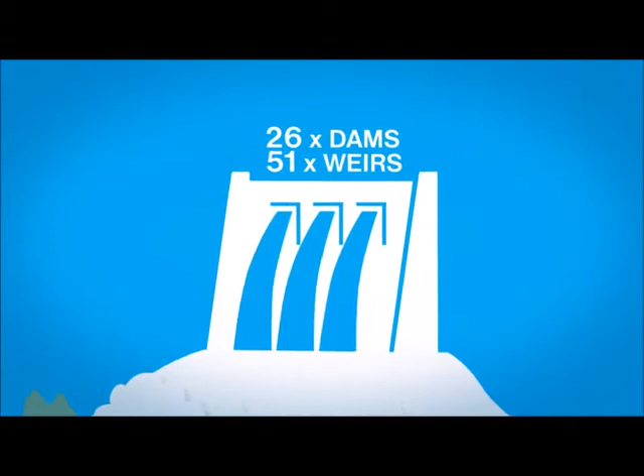Southeast Queensland uses about 300,000 megalitres of water a year, which is about 120,000 Olympic swimming pools. Roughly 70% of that water is used for residential purposes. That's about 165 litres of water per person per day and more in summer. The water we use starts its journey as rain. Water flows into a dam from rain falling in the area around it called a catchment. SEQ Water has 26 dams and 51 weirs to store the water we need to use when we need it. Dams and weirs also help mitigate floods and also provide the community with popular recreation facilities.

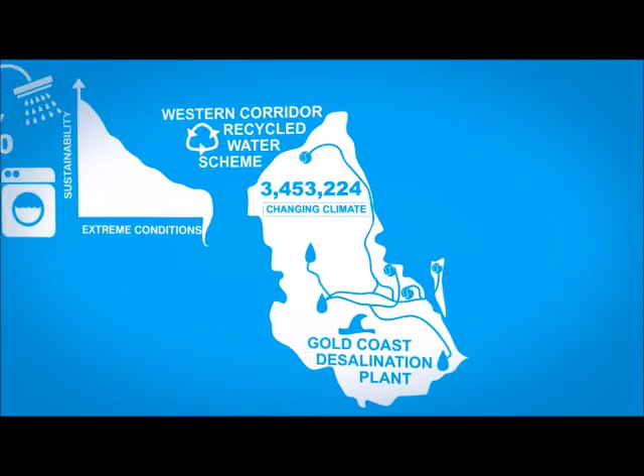We live in a climate of extremes. The volume of rain and where it falls can be unpredictable. We have long droughts punctuated by extreme floods. With our increasing population and changing climate, there is more pressure on our water supplies than ever before. The SEQ Water Grid is our connected network of water catchments, storage dams, treatment plants, reservoirs and pipelines. SEQ Water also have two climate-resilient sources of water, the Gold Coast Desalination Plant and the Western Corridor Recycled Water Scheme. No matter where you are in the region, it's important we develop good water habits so we have enough to meet future demand. Everyone has a role to play in using water wisely, so there's enough for everyone.

Well, that last little video just gives you a little bit of an indication and backs up what I said, just how the operation of the organisation goes. So it gives you an overview of how things operate. Let's move now to Wivenhoe. Wivenhoe is the largest dam that we operate of our 26 dams. It was built in the 1980s to offer two particular things to us. Obviously supply water, but also as a flood mitigation dam. There was some great flooding in the 1974 floods in Brisbane, as we know. And after that time, Wivenhoe Dam was built.

About 1.3 million megalitres of water of storage can be held for drinking, and a further 2 million or thereabouts can be held for flood mitigation if required. And obviously in 2011 and since that time, during Cyclone Oswald and other times, the dam has been used to store water as such. The 2011 floods were quite significant in that they were two single rain events greater than the 1974 floods, and the amount of water certainly provided for interesting times in terms of how we operate those facilities.

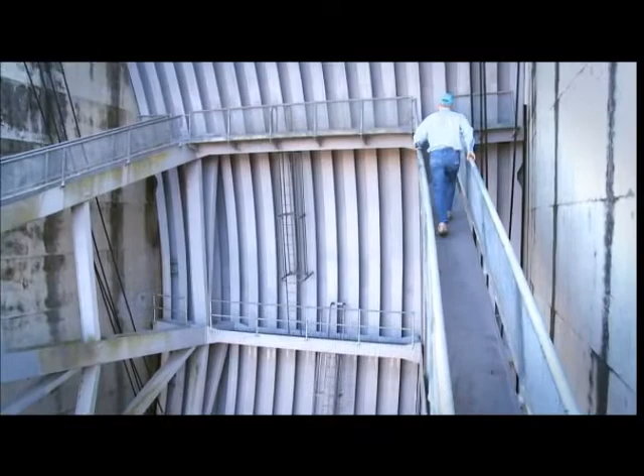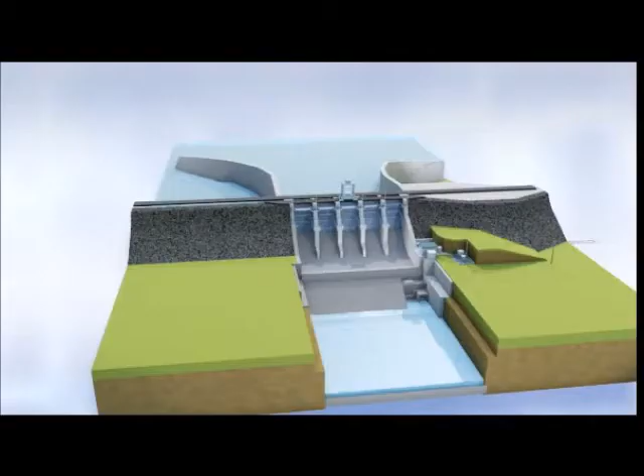Wivenhoe Dam. Wivenhoe Dam was designed and built as a multifunctional facility. As part of the Seqwater grid, Wivenhoe Dam's main function is to provide safe drinking water to Brisbane and the surrounding areas. It is also used to generate hydroelectricity and for flood mitigation. The dam has a storage capacity of 1.16 million megalitres for urban water storage. During a flood, however, the dam is designed to hold up to a further 2 million megalitres for a limited amount of time. This helps to prevent small floods and reduces the impact of a large flood.

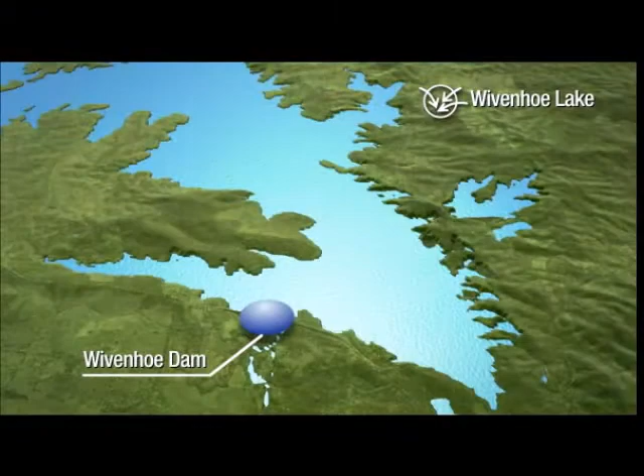Lake Wivenhoe, which is the body of water formed by the dam, is also the lower storage for a hydroelectric power station situated on the shore of the lake opposite Wivenhoe Dam wall. Enjoy the tour.

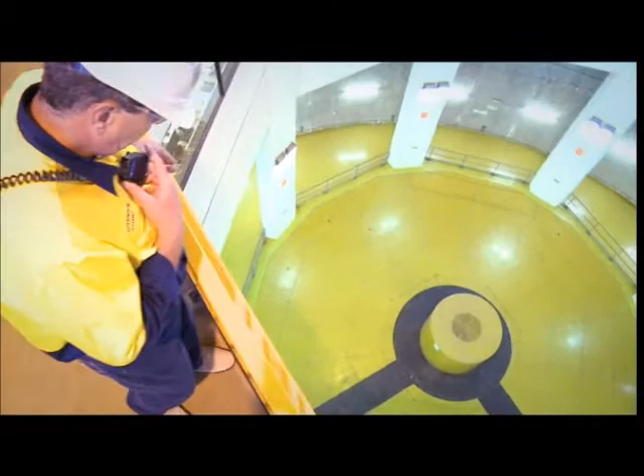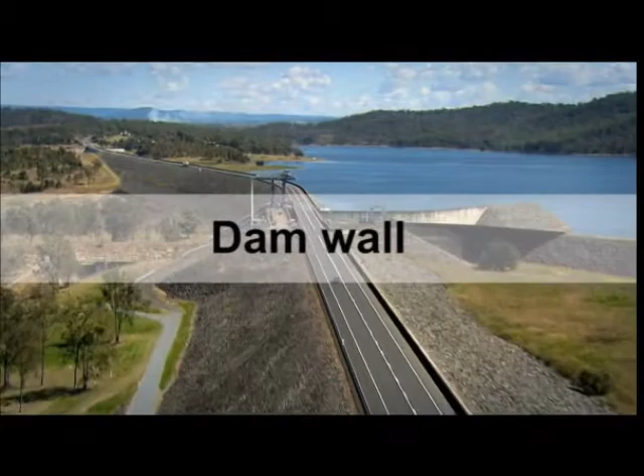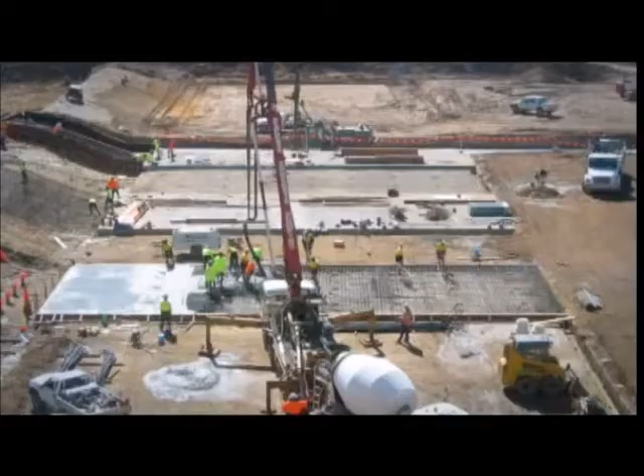Dam wall. Lake Wivenhoe was formed by building a solid dam wall across the river valley, stopping the river flow. This created a water storage for the community to use. Opened in 1985, the dam wall at Wivenhoe is 2.3 kilometres long and 50 metres high.

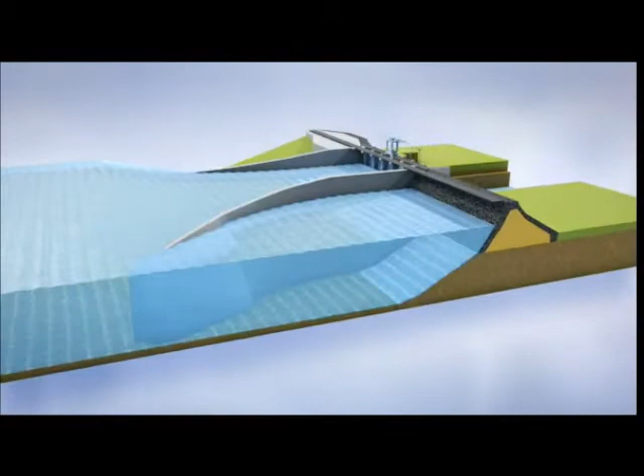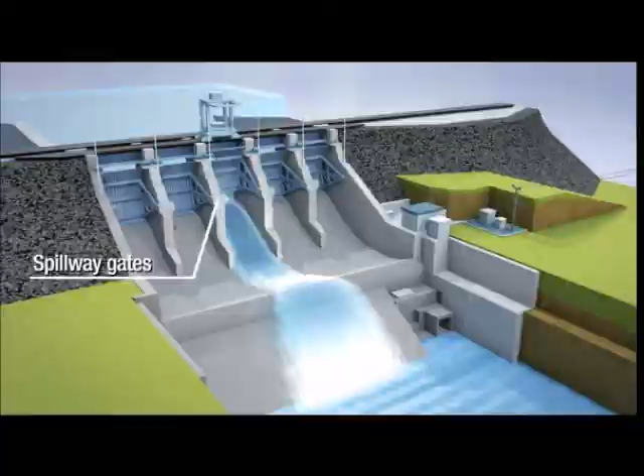It is built with a solid core of clay in the middle to prevent water leakage and an outer layer of rock for strength. It has a built-in spillway, which is a section of a dam designed to let a controlled amount of water out into the Brisbane River. Normally, this release is to maintain the river system and to provide water for treatment plants. However, in a flood, spillways also stop a dam from overflowing, something that could damage or destroy it.

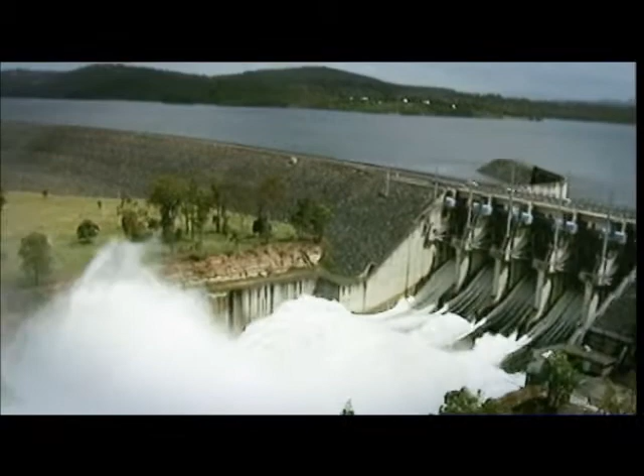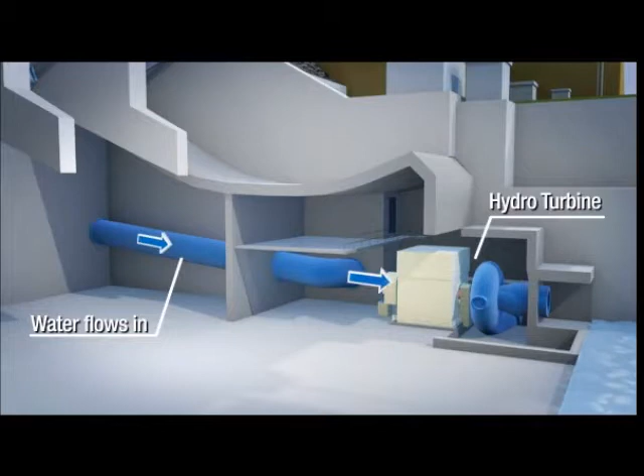Within the dam wall, there is also a small turbine used to generate hydroelectricity, which is one of the cleanest and most efficient forms of energy generation.

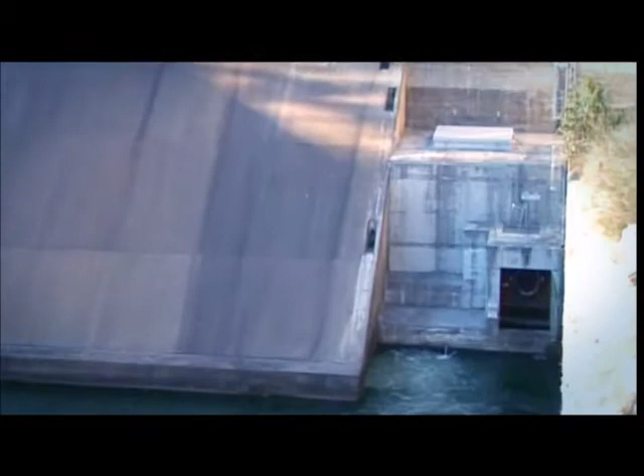Rainfall and storage. Australian weather has always been about extremes. Frequent periods of severe drought and major flooding are well documented throughout the continent. Experts predict that climate change will have an increasing impact on natural ecosystems through increased temperatures, extreme weather events, and less rainfall in many regions of Australia.

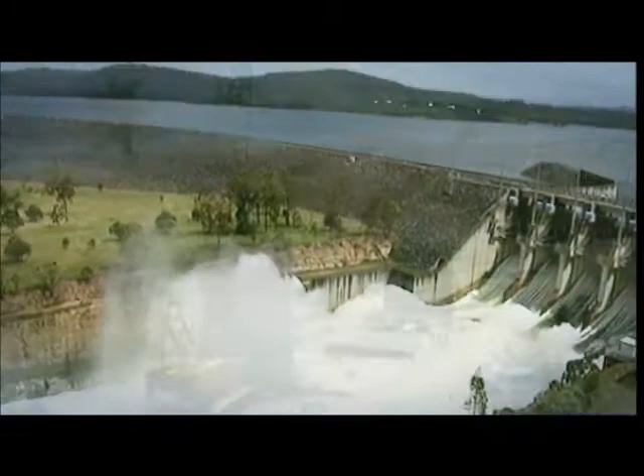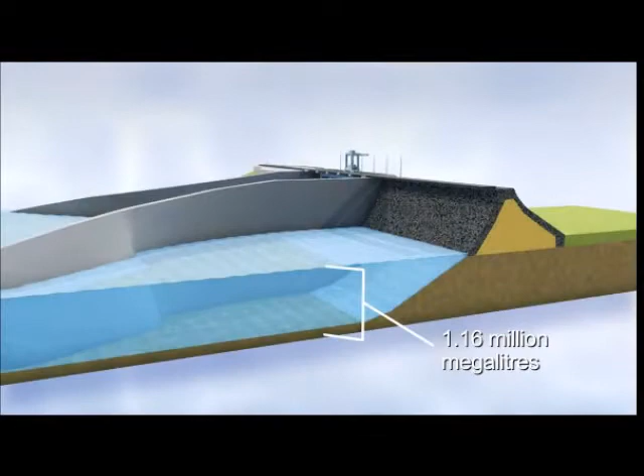Wivenhoe Dam was originally designed as a flood mitigation and water storage dam following the 1974 flood. At full capacity, Wivenhoe Dam contains 1.16 million megalitres of drinking supply and more than double that of temporary floodwater storage. After 7 days of storage at full capacity, the floodwater held in the dam has to be released. In an extreme flood, an auxiliary spillway wall will erode away to allow further floodwaters to be released and to ensure the safety of the dam wall.

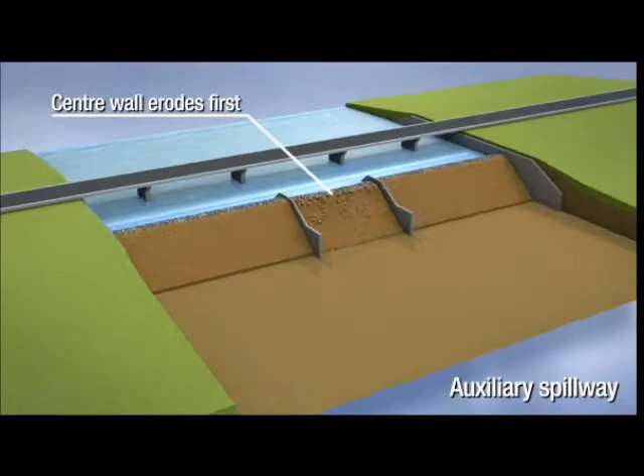Well, I hope Wivenhoe is very clear in your minds now and you have a good understanding of it. But again, when this whole crazy business is over, we'd be very keen to take you out and have a look, because there's nothing like standing within the wall, having a look at the facilities around there and just seeing how much of a massive beast it really is. A lot of people take it for granted, but it's an incredible facility, and it's really worthwhile getting a look at firsthand. So hopefully you'll get a chance of looking at that at a later stage.

We're now going to travel down the river, 60 kilometres or thereabouts, and we're going to end up at Mount Crosby water treatment plant. The original Mount Crosby water treatment plant, the pumping station, was built in the 1890s to supply water from the Brisbane River in the early days via a number of our early dams, Lake Manchester and Gold Creek Dam and those. Today the water goes to the Mount Crosby weir, where it is pumped out to two stations.

East Bank takes the water, and it can produce at its maximum around 700 odd megalitres of water. There's also a newer plant that was built later called West Bank, and we can produce at full capacity there about 250 megalitres of water. So working full capacity, East Bank and West Bank could probably supply our southeast region, but the reality is we've still got to pump it over very long distances. So we're going to have a look at West Bank. As I said, we take the water through a number of facilities from the river into the treatment plant where it's treated. And the water treatment process is very simple.

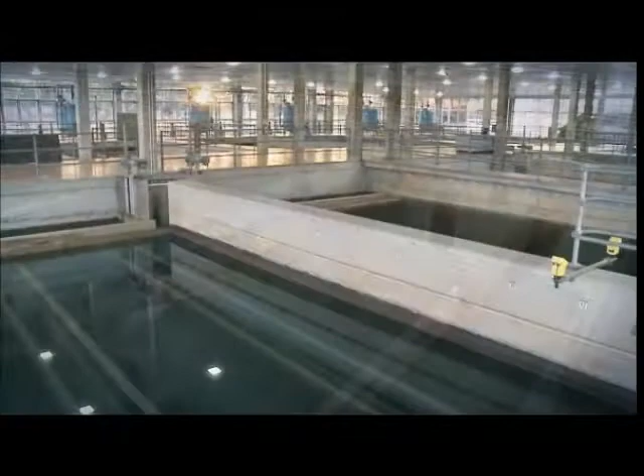Treating water. The West Bank water treatment plant at Mount Crosby takes water from the Brisbane River and treats it to drinking quality before it is sent to customers' taps. During the treatment process, organic matter, sediment, and minerals such as manganese and iron are removed. Finally, the water is dosed with chlorine. Fluoride is added to reduce tooth decay.

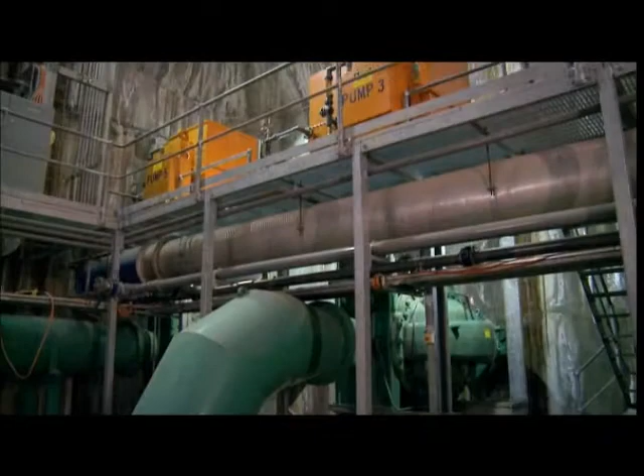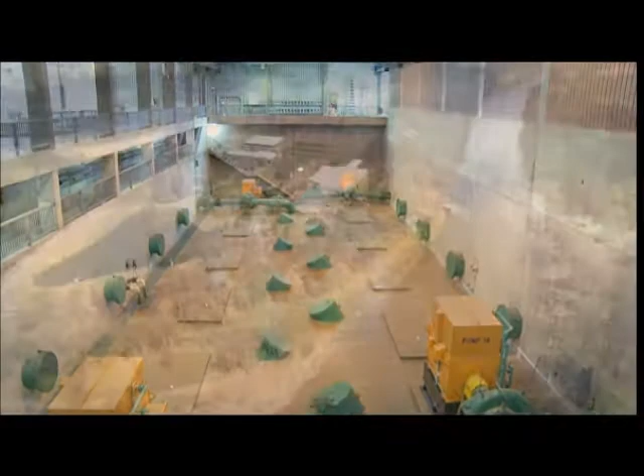The water is monitored and tested at all stages of its journey through the treatment process to ensure that by the time it leaves the plant, it meets Australian drinking water guidelines, which are amongst the strictest in the world. The plant has a capacity to produce 250 million litres of drinking water a day. It can be expanded if required to be 4 times larger in size. Enjoy the tour.

Drinking water supply. Drinking water is pumped to reservoirs at Cameron's Hill. Fluoride is also added prior to Cameron's Hill reservoirs as a protective dental health measure. As the water leaves Cameron's Hill Reservoir, chlorine and ammonia are added to produce chloramine, a long-lasting disinfectant that prevents the formation of microorganisms. East Bank and West Bank water treatment plants produce enough water to supply Brisbane and surrounding areas that are connected to the South East Queensland water grid.

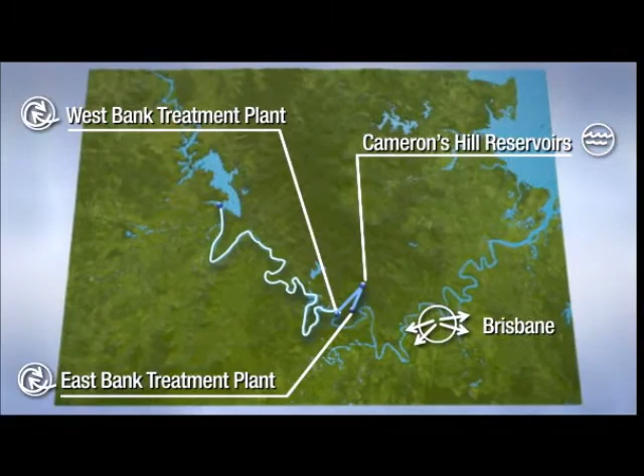The water from the East Bank and West Bank treatment plants supplies the Brisbane region and connects to the South East Queensland water grid. The water grid is a network of treatment facilities, pipelines, dams and reservoirs that moves treated water across the region to where it is needed.

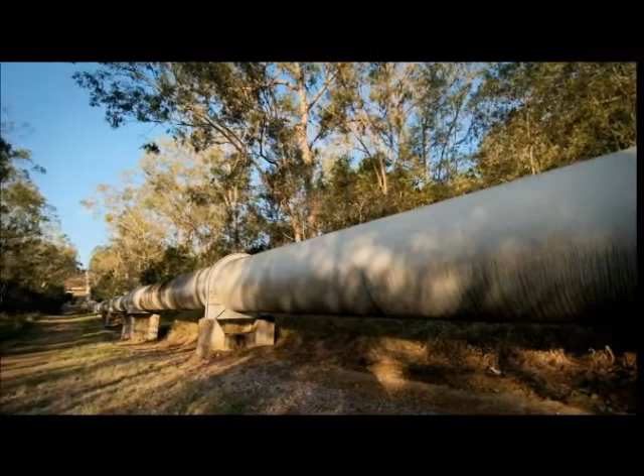Okay, so far we've got the water in the storages at Wivenhoe. You've seen that. We're moving down the river now. We've gone to Mount Crosby. You've seen how we've cleaned the water up there. And as I said, the most important thing we've got to really worry about is the silt and the material that's in the Brisbane River. Remember, after the water comes out of Wivenhoe, it travels down the Brisbane River, and there are a lot of farms, there's fertiliser and things that end up in the water supply, and there's also sewage plants that release their effluent into the Brisbane River as well. So Mount Crosby's a significant facility and quite important to the people of Brisbane.

But as I said to you, all of that's fine and good as long as we have rain. If our dams are full, that's great. But even in flood time, if the water is too dirty, too turbid, we can't treat it, as we did in 2011. So we need to have alternative water supplies. In the 2011 floods, we were able to bring water from the desalination plant up into Brisbane to supply water there for quite a while when many of our treatment plants were inoperable.

But now we're going to travel to Bundamba, not far from Mount Crosby, and here is our advanced water treatment plant. One of them that takes water from the river and takes water from Goodna, Bundamba, and a couple of other sewage treatment plants that are owned and operated by Queensland Urban Utilities. The water is already treated to an environmentally friendly standard that's dropped back into the river, but it still has elements in it, nitrates and phosphates, that are not good for the environment. But it also has organic matter in it and other biological matter which we can remove through the processes at this advanced water treatment plant. And Bundamba operates to be able to provide that water for the future.

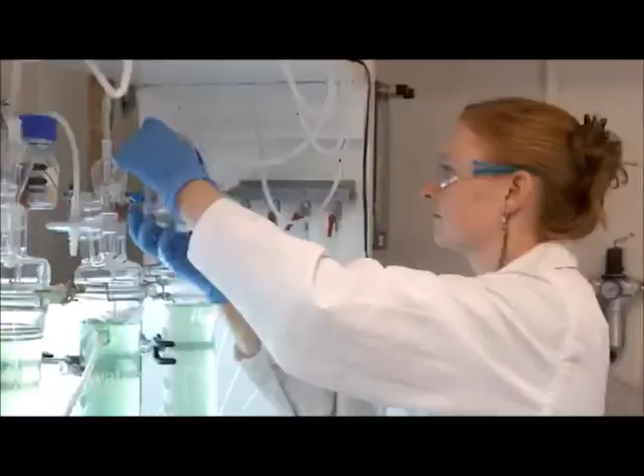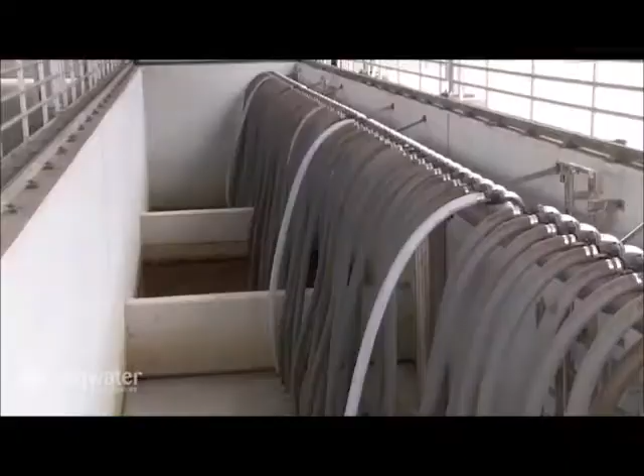Water we've already used, called wastewater, is generally treated before being released into our rivers or oceans. Recycling this water for drinking means taking this pre-treated wastewater and purifying it to exceed drinking water standards so that we can use it again rather than waste it. How is this done? The wastewater undergoes multiple processes to purify it. The key ones to be aware of are microfiltration, reverse osmosis, and advanced oxidation.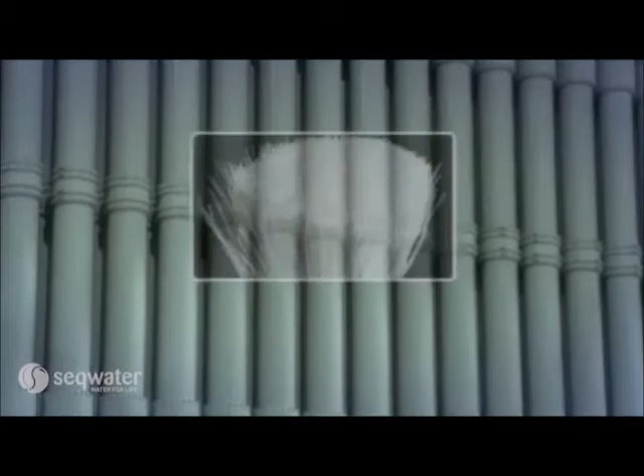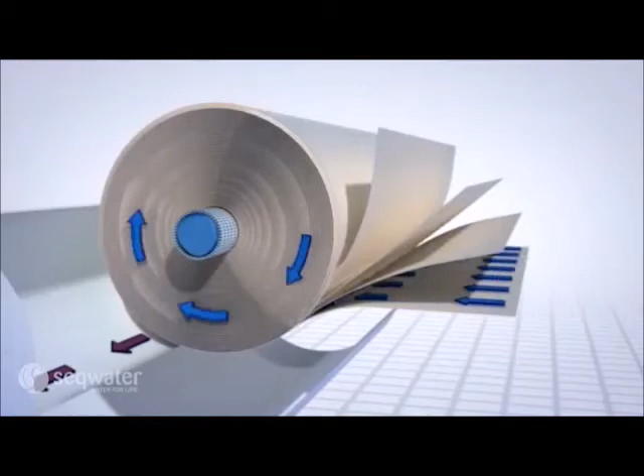To explain, microfiltration involves passing the pre-treated wastewater through fine membrane filters that remove particles and microorganisms, including bacteria and some viruses. In the reverse osmosis stage, this filtered water is forced through a special membrane at high pressure to further remove other impurities, such as pesticides and viruses.

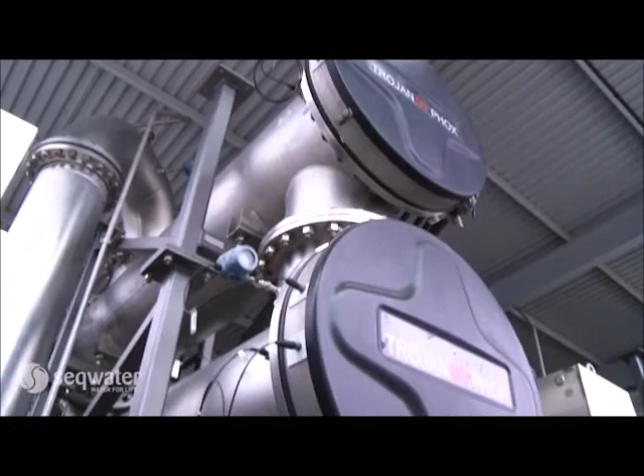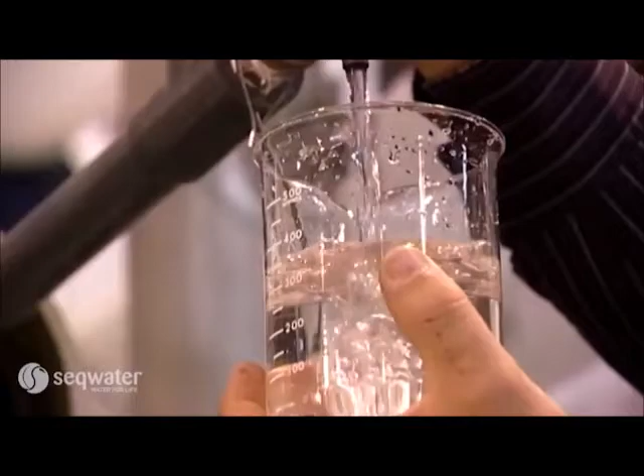Finally, during advanced oxidation, the water is exposed to ultraviolet light and hydrogen peroxide. This process removes remaining traces of organic compounds and organisms. The result is purified water of a very high quality. In fact, the water exceeds Australian drinking water standards.

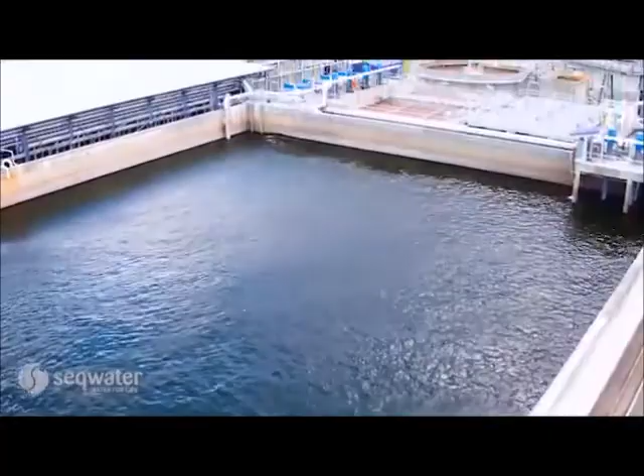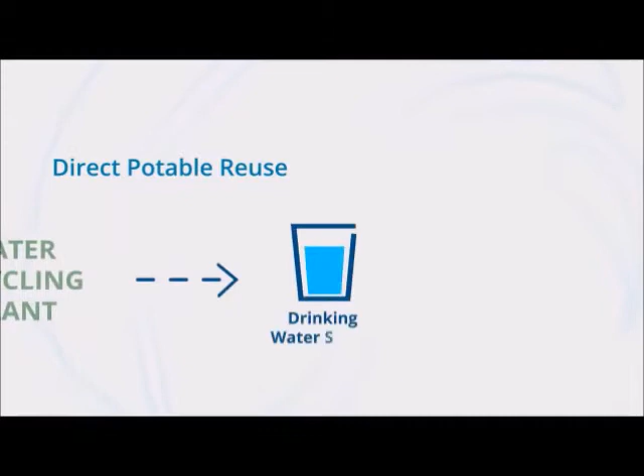There are two ways purified recycled water can then be introduced to our drinking water supply: direct potable reuse and indirect potable reuse. Direct potable reuse means putting the now purified recycled water directly into the drinking water supply. This is an energy and cost-efficient method of recycling water, as it eliminates the need to pump the water to a storage facility, then retreat it.

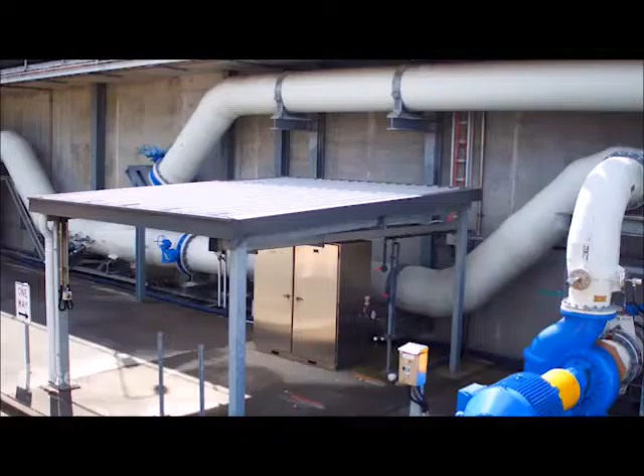Direct potable reuse schemes are growing internationally, with countries such as the United States and South Africa increasingly using it as a vital water source. Current state regulations don't allow for direct potable reuse schemes in Queensland. This may change in the future as acceptance and understanding of these schemes increases.

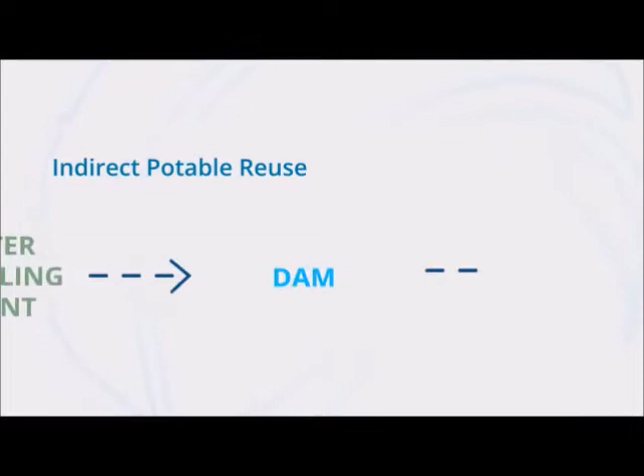Indirect potable reuse means adding the recycled water to other untreated water, generally in a dam or groundwater basin. The purified water mixes with the untreated water and is treated again in a conventional water treatment plant before entering the water supply. This water supply is currently being used in over 20 sites across the world, including California, London, Singapore and Perth.

Sometimes indirect potable reuse is unplanned. This happens when communities along a river or waterway discharge their treated wastewater into the river, which then flows on to communities downstream, where it's extracted and treated for drinking water. This is common in Australia and around the world.

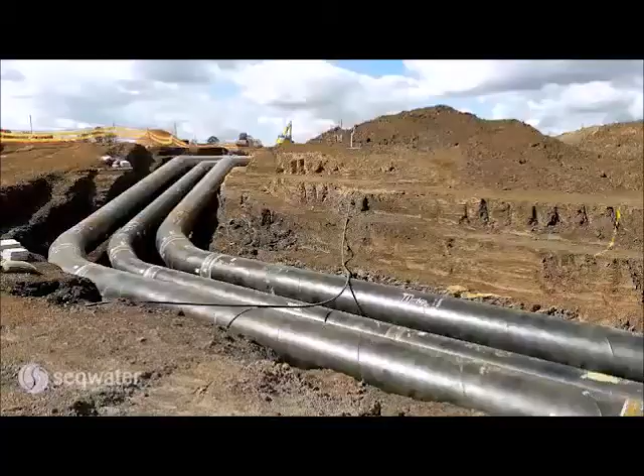In southeast Queensland, we have the ability to produce purified, recycled water through the Western Corridor Recycled Water Scheme. This scheme was built during the Millennium Drought, but is not currently in use. When operating, it can produce up to 180 megalitres of water per day. This water can be used to replenish Wivenhoe Dam before being treated again at the Mount Crosby water treatment plants.

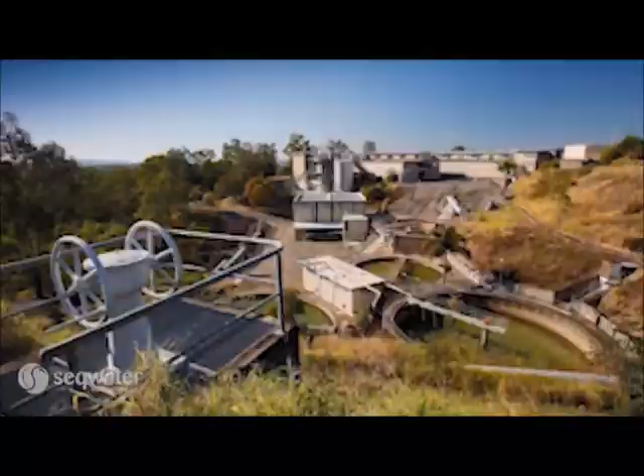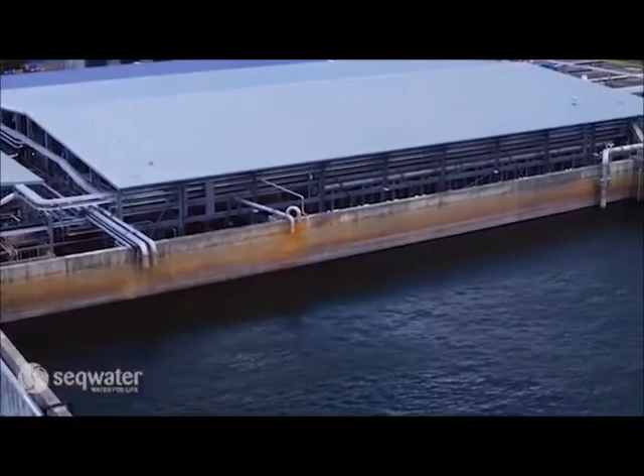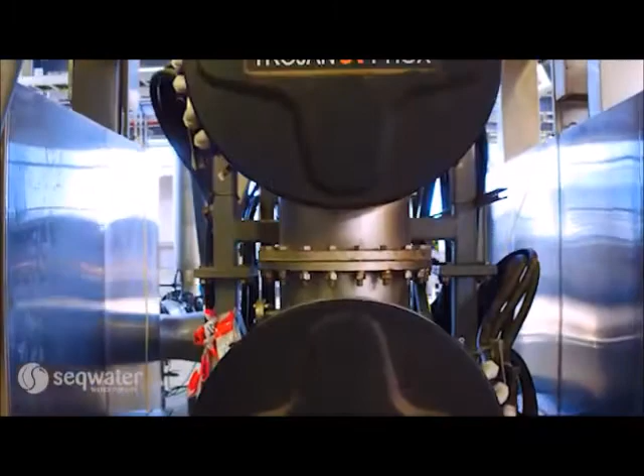Recycling water for drinking is a climate-resilient option. It is marginally impacted by drought, as we generally use less water during dry times, meaning there's less wastewater available for purification. In comparison to other water supply options, recycled water is less energy intensive and less costly than desalination, but it does require more energy to produce than surface water and is therefore currently more expensive.

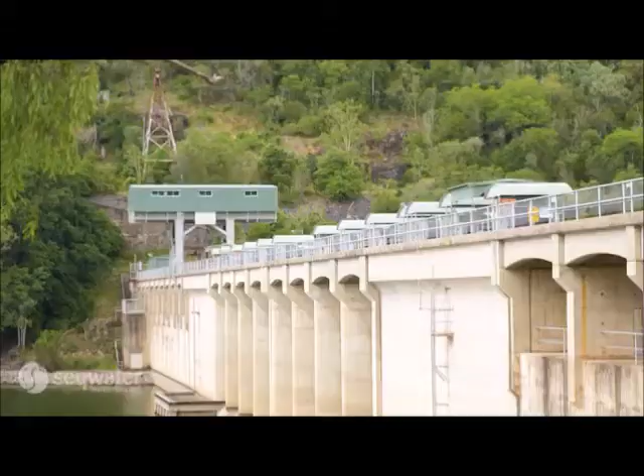The regulators of water recycling schemes here in Australia and worldwide currently ensure the monitoring of water quality standards are higher than those applied to most other water supply options. Regardless of whether recycled water is introduced to the water supply directly or indirectly, it is a resilient water source, often resulting in reduced nutrient discharge into our waterways.

Well, that's about it, folks. I hope you've enjoyed the journey of water from the clouds to the tap, basically.

As I said, Wivenhoe Dam is a tremendous facility, and our other dams within our network operate exactly the same way in many respects. As I said, there's only a number of gated ones, but a lot of them are passive spillways. But the reality is that they all combine to give us a capacity to supply water, whether it's a dam, a weir, an aquifer, or something else within our network.

It provides that. And the people that work within our region as Seqwater team members are certainly playing a very important role in supplying water and water security within Southeast Queensland.

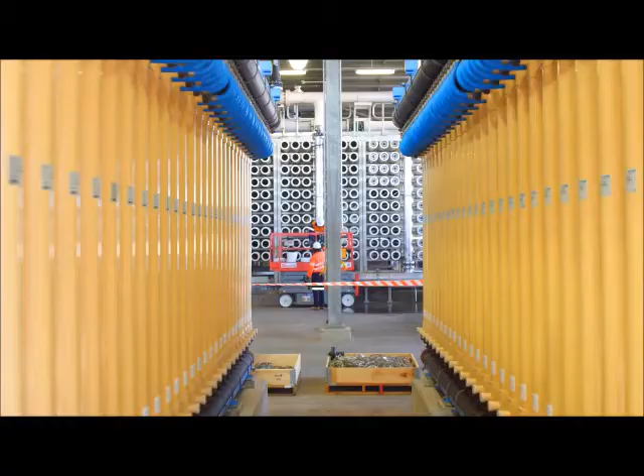Whether you drink it, work with it, or play in it, water is an essential part of every Southeast Queenslander's life, every day. Delivering that water to more than 3 million people in a safe, clean and reliable way is what Seqwater does. That means much more than managing our 26 dams and catchments, because dams hold water, they don't make it. The lessons we've learned from the Millennium Drought and from subsequent floods is that you can't always count on the rain when we need it, where we need it.

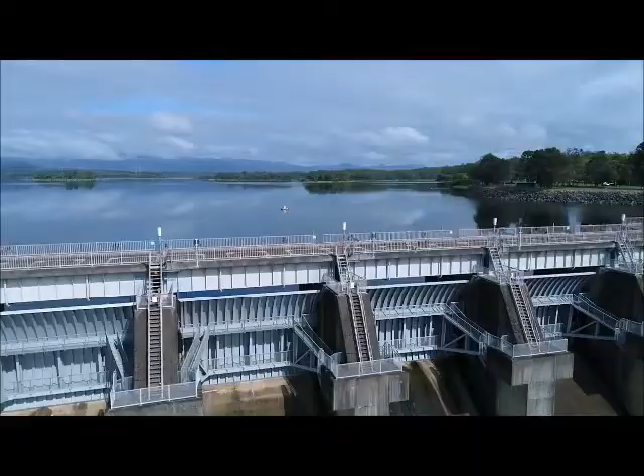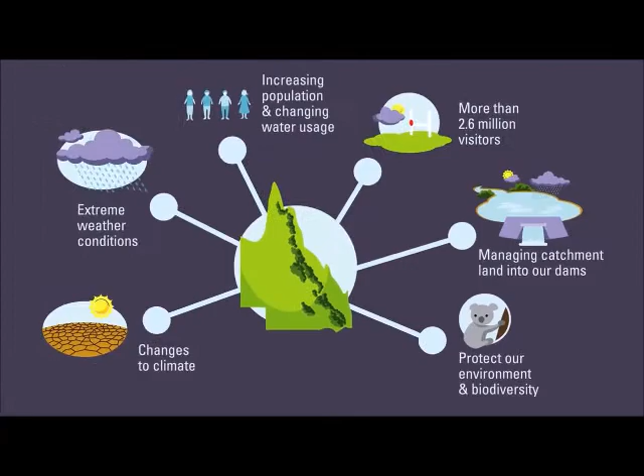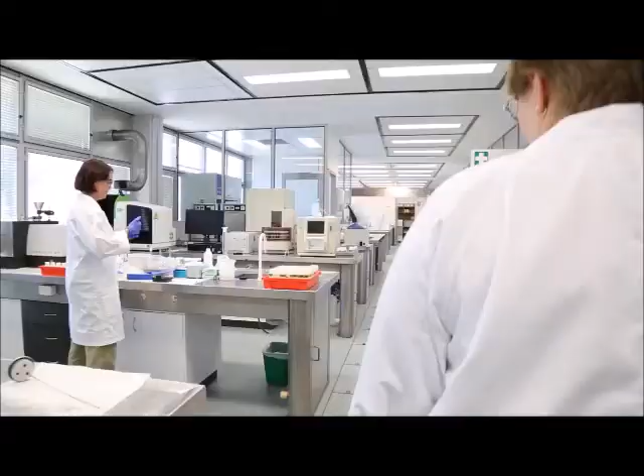So to secure our water future, we need to plan. Plan for the challenges of our climate, for extreme weather conditions, for an increasing population and changing water usage, for more than 2.6 million visitors to our recreation sites each year, plan to manage the 1.6 million hectares of catchment land that water flows across and into our dams, and of course, plan to protect our environment and biodiversity. At Seqwater, we have a plan to meet the challenges of today, tomorrow and the future, enabling the continued supply of safe, clean and reliable water.

At the heart of our plan is our unique water management and distribution network. In Southeast Queensland, we now have more than 600 kilometres of pipeline connecting a series of treatment plants fed by major drinking water storages from Lake Macdonald in the north to Hinze Dam in the south. We call this the water grid.

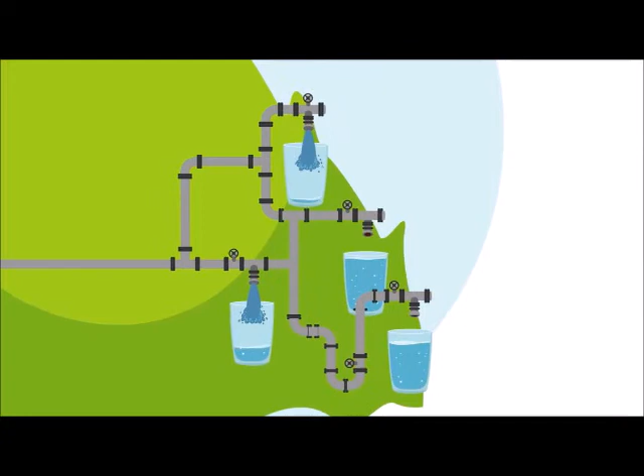As our regions experience different weather patterns and rainfall events, demand for water varies. The water grid means we can support local supply by moving water around the region in both directions, from the Sunshine Coast to Greater Brisbane and the Redlands Coast to the Gold Coast. That treated grid water is delivered by us to our water service provider partners, where its quality is tested again and then sent to household taps.

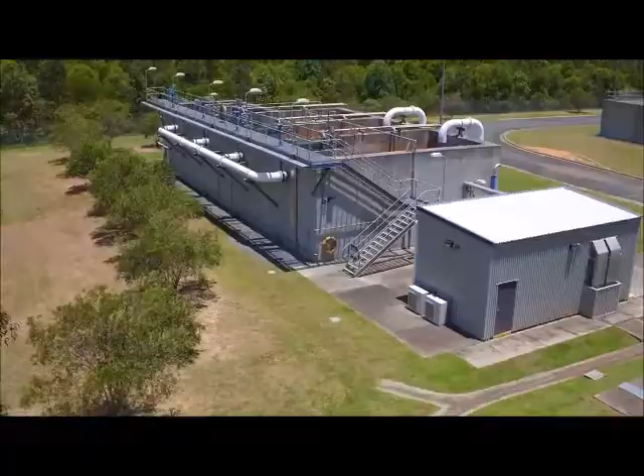But moving water still relies on water being available, and because we can't always count on the rain as our only water source, we've built advanced water treatment plants and a desalination plant to treat wastewater and seawater and provide an alternative source of water that meets the stringent Australian drinking water guidelines.

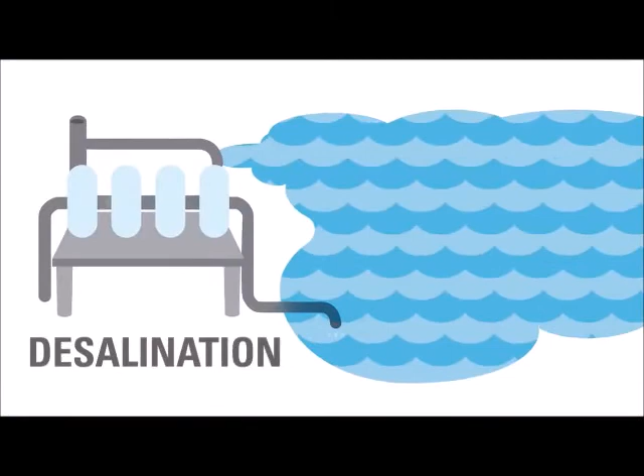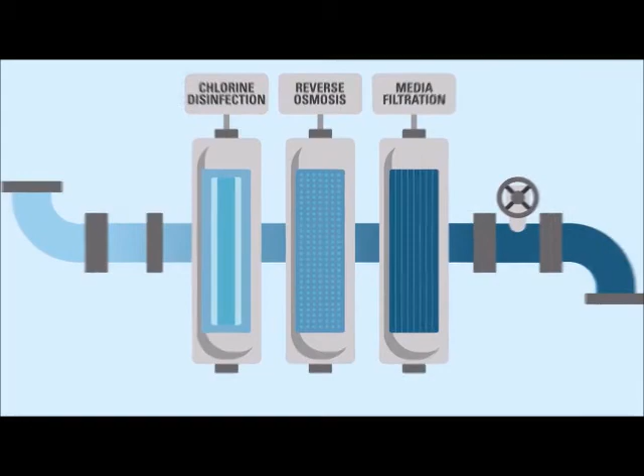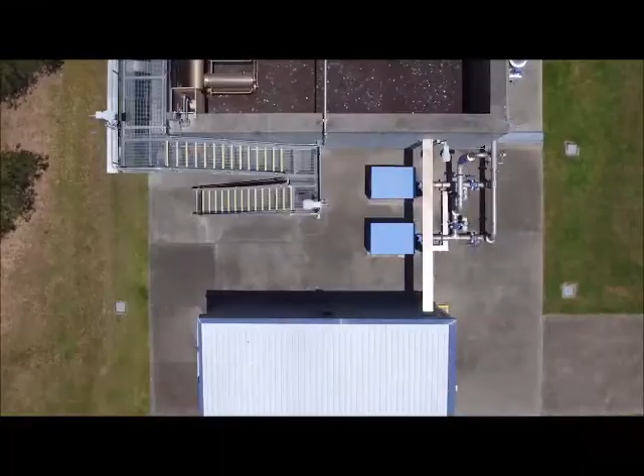Desalination moves seawater through multiple treatment stages to remove salt and other minerals. The main stage of desalination involves a process known as reverse osmosis, where water is passed through a series of filters under high pressure. The desalination plant at the Gold Coast already contributes to our region's water supply and water security. Advanced water treatment plants also play an important part in our water future.

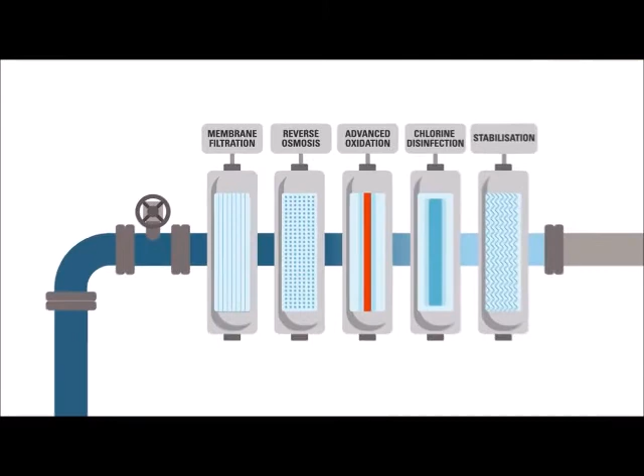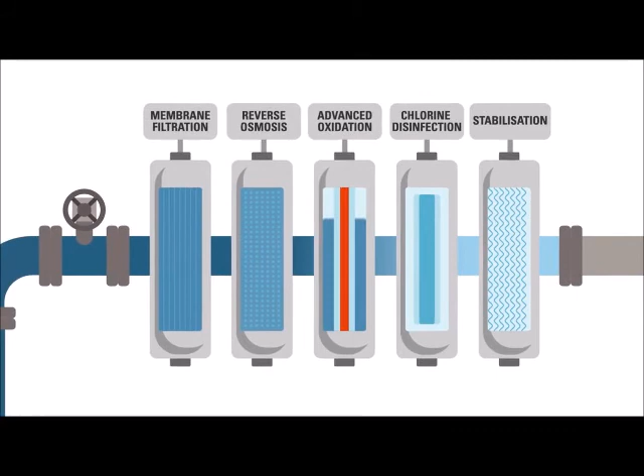Our 3 plants take treated wastewater, or water that's already been used and processed at a wastewater treatment plant, and pass it through additional treatment stages. The main stages are membrane filtration, where water passes through filters to remove particles and microorganisms, reverse osmosis, UV advanced oxidation, where hydrogen peroxide is added and reacts with UV light, chlorine disinfection, and stabilisation.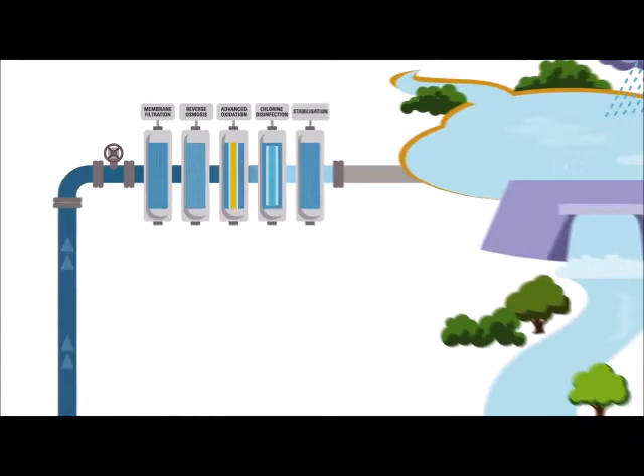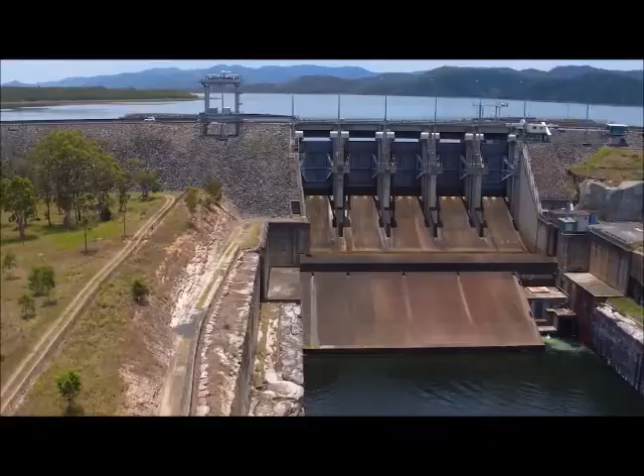At the end of this process, the treated water already meets Australian drinking water guidelines. However, the final stage of the process is for this water to be dispersed into Wivenhoe Dam and eventually make its way through our water treatment plants once more. Together, our dams, our water grid, desalination and advanced water treatment plants provide the key assets for our plan to provide South East Queensland with a climate-resilient water supply into the future.

We can count on another drought. We can count on more floods. But what we can't count on is rain when we need it and where we need it. This is why we continue to develop a robust plan for a sustainable water future for South East Queensland.